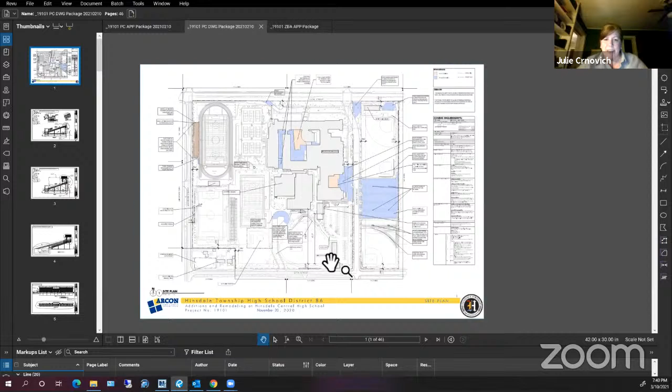And I was wondering, do you think it would be possible to do like what you did at the ZBA meeting and break it down per each request on the application? Yep, what I'll do is give a quick overview of everything, and then drill down on each portion, so we'll talk a little bit more in detail about the grandstands and the additions and whatnot. Thank you, that would be great, I'm trying to follow that same format. Thank you. For sure.

So this is phase 2 of the referendum projects. Last year we went through this same process with phase 1 successfully. This is the second piece, and will be the final piece for the referendum projects that we bring to the village.

For phase 2, we've already gone through 3 meetings with the Zoning Board of Appeals. Several items were approved by the board, and several are recommended to the Board of Trustees for their final jurisdiction. We're planning to go to the Board of Trustees next month.

Just to recap on zoning, we went for 6 areas of relief with different variance requests each. Those areas were the grandstand and press box structures, and the perimeter fence behind the grandstands that we need to remove and replace to get to the grandstands to do that work. We also have a new ticket booth accessory structure for the football field.

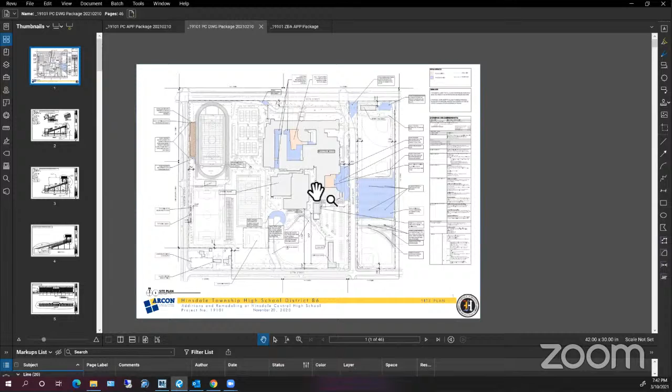At the varsity baseball field, we're proposing safety netting, very similar to phase 1 at the JV field. There were some fence replacements at the JV softball, JV baseball, and varsity baseball fields. And at our east parking lot off of Grant Street, the new lot we put in last summer, we requested 2 additional parking lot light fixtures with the ZBA.

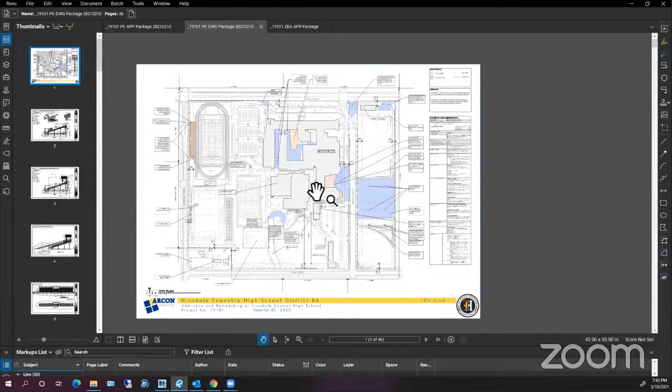For phase 2, just like phase 1, our goal is to match the existing conditions of the building aesthetically and architecturally as much as possible while upgrading to today's standards. All of our work and additions harken back to phase 1, and we're trying to match what we did there for a complete campus feel.

I'll move from left to right because that's how our application was really assembled. So here's a site plan of the high school campus.

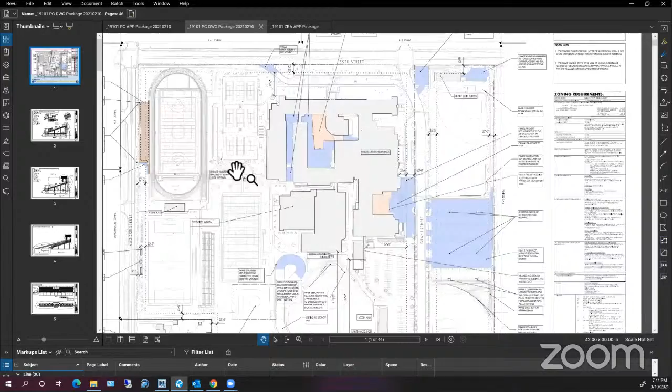First, we have the home side grandstands and press box, proposed to be replaced relatively 1-for-1. We're proposing a new ticket booth accessory structure, kind of in between the practice field, tennis courts, and football field.

The areas highlighted in blue are either parking lot or street roadway renovation work or replacements. And within the courtyards proper, restoration work, because we're tearing up the site pretty good in order to get into the interior courtyard for the student services addition.

With athletic fields, before I get into the building proper, we have work proposed at the varsity baseball field here—a backstop replacement with a masonry knee wall and safety netting, an improvement over the chain link backstop that's already there, very similar to what we put in for phase one. There's some ancillary chain link replacements there as well.

East of Grant, we have fence installations in the outfield for the JV baseball field to protect from a new proposed drainage swale. And at the junior varsity softball field, backstop and chain link replacement—it's about time that chain link fence and backstop be replaced.

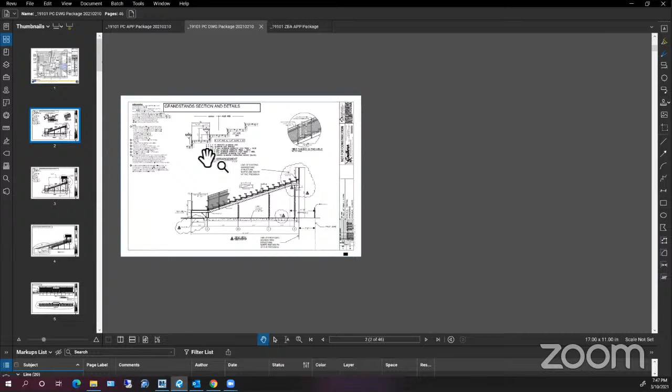Getting down into more detail, a more granular level—grandstands and press box. Some of the highlights here, I might jump around a little bit, but we're replacing the structure. It's time to replace it. We're not expanding it.

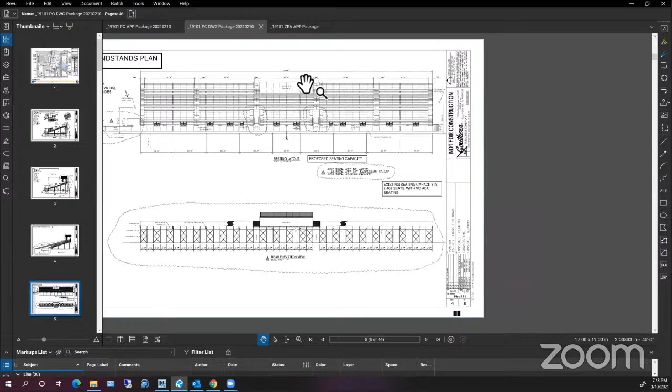The existing seating capacity is 2,402 with no accessible seating. New seating is 2,409 with accessible seating—a slight increase, not by much, but with a much more accessible layout and better sight lines. There's also a slight increase in the press box size. What's out there currently really doesn't meet today's varsity soccer, baseball, and lacrosse field standards.

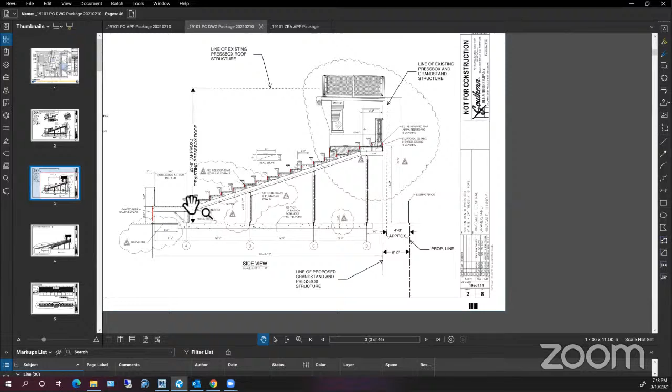Some other highlights to mention: the proposed press box is actually shorter. The overall structural height is proposed to be 20 feet 9 inches to the top of the roof. There's an observation deck here, just as there is currently. But the existing press box is higher than that, at 23 feet 6 inches. With improved angles of repose and sight lines, we're able to reduce the height of that structure. So although it's an incremental improvement, it does slightly improve sight lines from residences across the street.

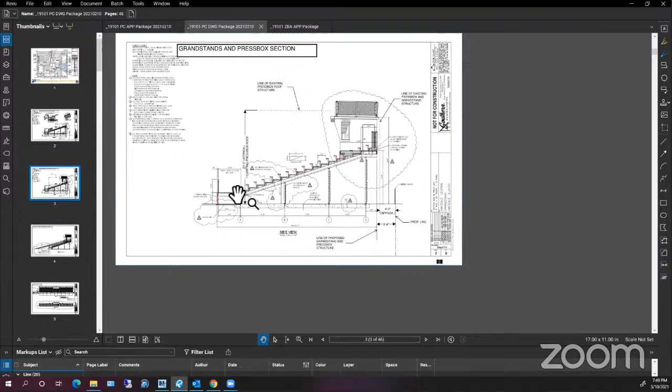Grandstand press box and the colors we're going with - again, we're looking to match what's existing. The grandstand press box manufacturer doesn't really provide colorized renderings or details, but I do have some examples to show. The press box will be white in color with red trim.

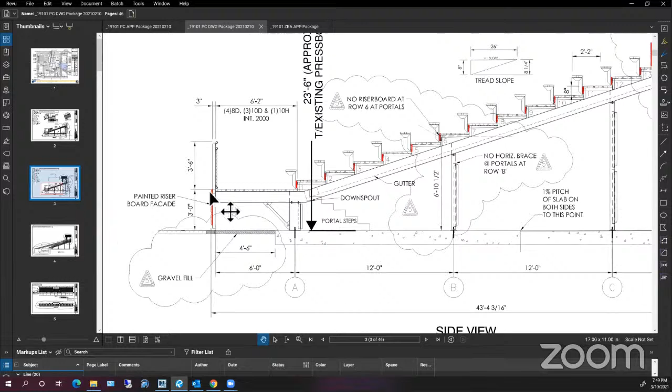The general structure of the bleachers will be anodized aluminum, just as it is today, with some highlights - the riser boards, highlighted here in red. At the track level, the front riser board, and if you think about when you're sitting on the bench in the bleachers, what's behind your knees, kind of behind the calves - these riser boards would be red for school colors.

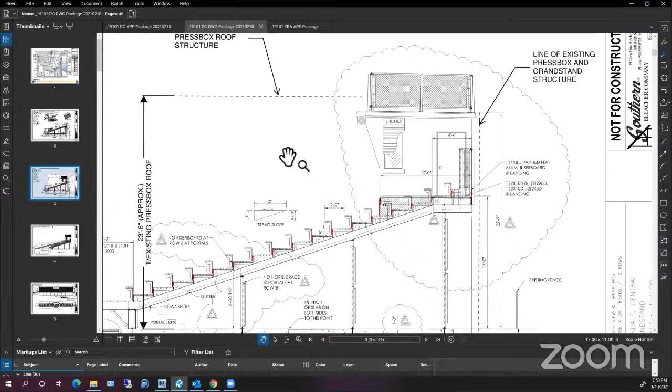Any chain link fence that we have - existing is anodized aluminum now. We are proposing black vinyl, which is an upgrade to match what we've been doing elsewhere on the site for site athletics. Cleans it up, looks a little sharper than just the anodized aluminum, so a bit of an upgrade there.

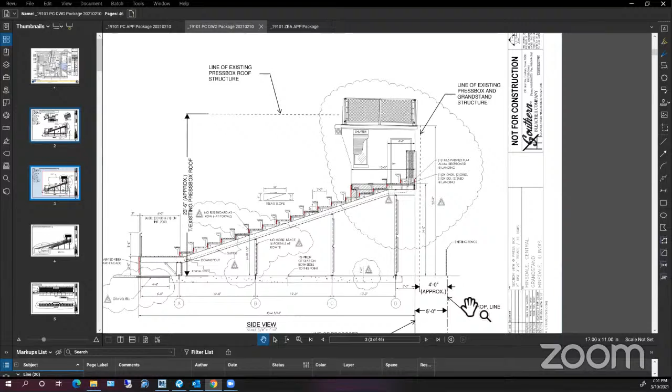White, I don't think red. Can we see what you're trying to display now? Do you not see? Still see the cars - there you go. Oh, there, okay, now? Oh, I'm sorry. Thank you for the heads up.

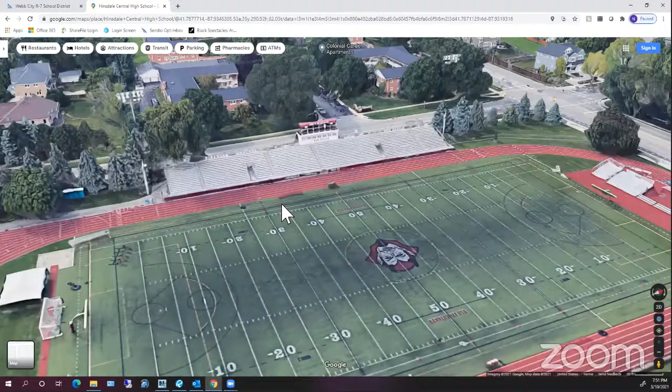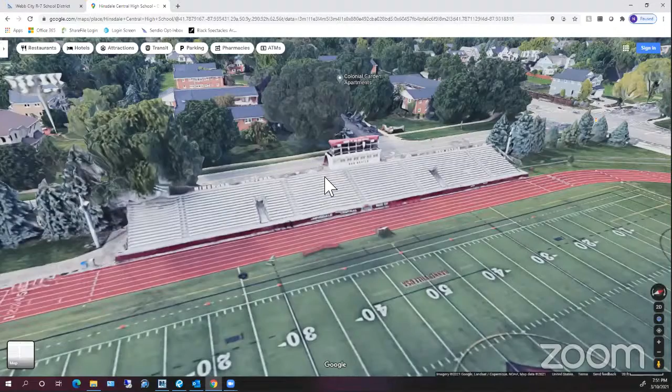You're good. So this is a view of the, a little bit of an older aerial, but the existing press box bleachers - white press box with red accents, anodized aluminum structure, kind of turning around to the backside off Madison.

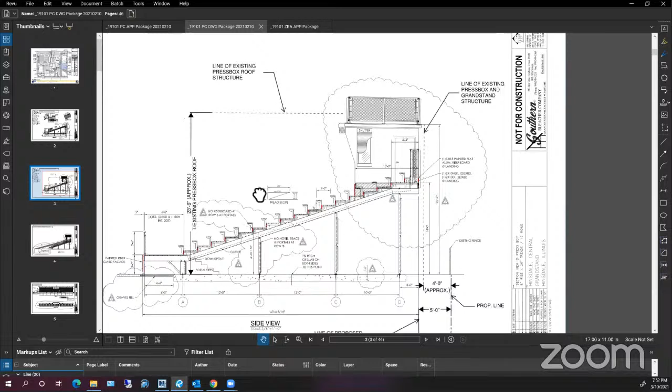Okay, we should be back to... are you planning any of the stadium lighting in the section drawing? The stadium lighting is all existing to remain - we're not touching the stadium lighting. Thank you.

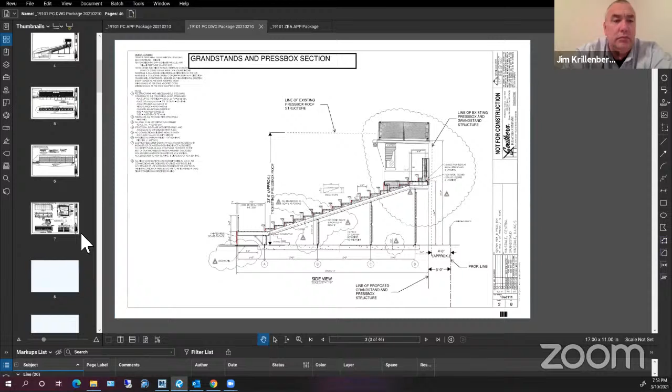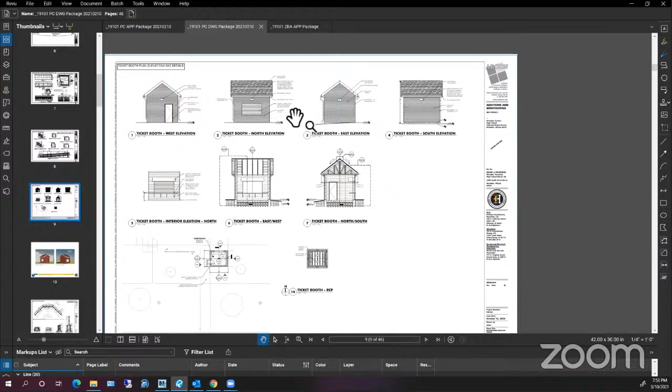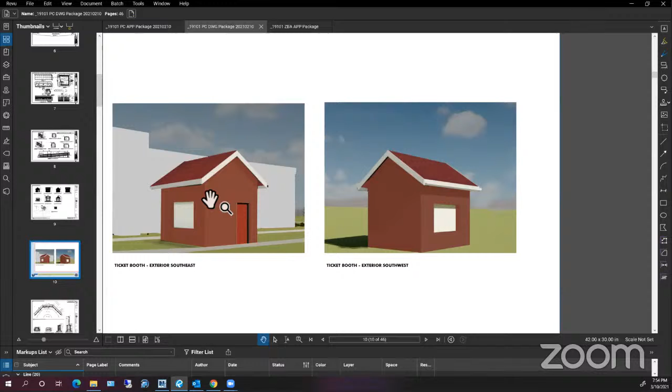Moving a little further into the site, we do have a very simple ticket booth structure. If anybody's familiar with the campus, there's what they call the huddle house on the south end of the football field - this structure is meant to really play off that and match. That huddle house has red brick with a darker maroon red shingle. Again, going with school colors - red, white, red door, and the overhead would be white as well. So again, we're trying to match structures on campus where it makes sense - this is the site athletic building next to the football field.

Similar question to the lighting - are you moving fencing around? Fencing - what we have proposed, and what we went with for zoning, is really one-for-one replacement. There's no new fence locations.

It's a one-for-one replacement where, for instance, behind the press box here, this existing fence needs to come down so we can get to, take down, and put up the press box and grandstand, so we don't destroy the new field and track we put in last summer. Any other fencing related to the baseball and softball fields is all one-for-one - we're not moving fencing, we're not putting up new fencing on the west here. The only new fencing location is in the outfield to the JV softball.

Great, that'll be welcome. And yep.

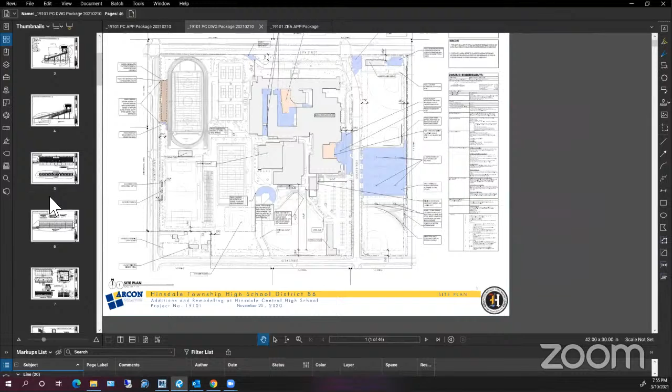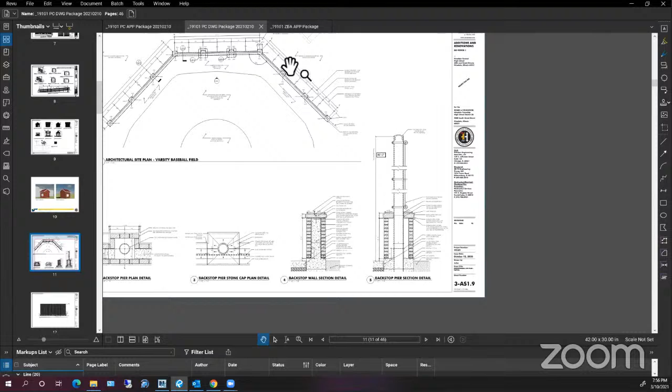Moving on to the varsity backstop, again, safety netting. This is exactly what we put into the JV field last summer. We are putting in a new masonry knee wall. You can see this detailing on campus at the North Varsity softball field by the admin building, off of 55th Street, again red brick to match. There are dugout structures here to the south. Those dugouts are all existing to remain. We're just matching what's on campus.

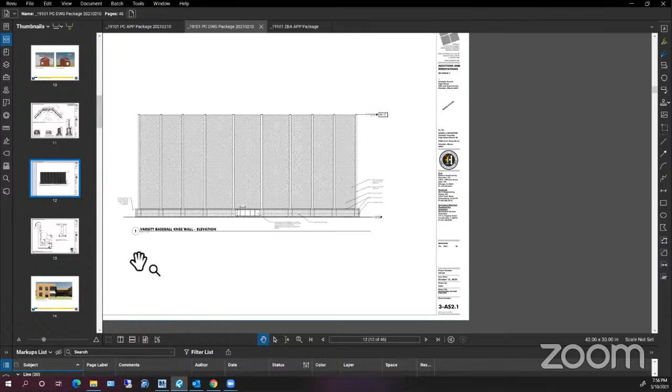Okay, so now moving on to major additions. First one here is the student services addition. We're cleaning up and repairing the courtyard because we're tearing into it pretty good for the construction of this addition. The addition's clad in brick, and the brick matches exactly what we did in phase one and proposed in phase one. We're going for a consistent feel for all the referendum projects.

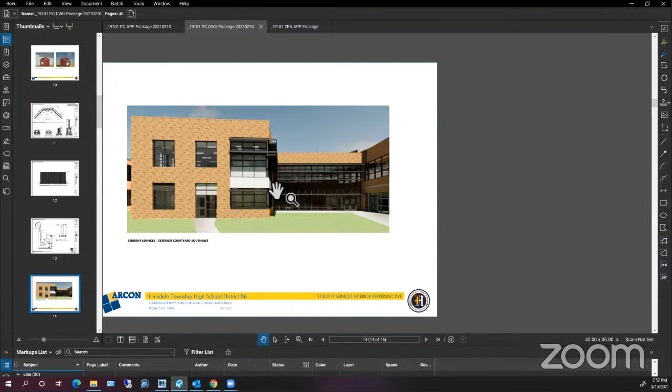We do have aluminum windows and curtain wall, some metal panel, white metal panel banding accents. Again, you can see that on the phase one additions, matching that. We do also call out for some sun louvers here on the south end to shade the inside spaces with that southern exposure. The other thing it does, it covers up the old library addition, where the brick didn't match anything. So we're bringing it back to, again, a consistent campus feel.

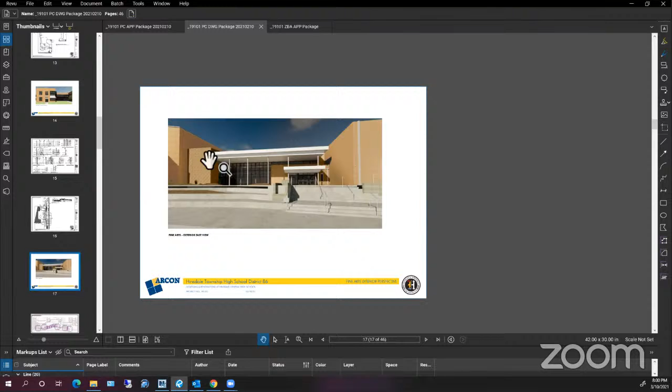Kind of an added outdoor space that they don't currently have. So we tier back, and again, the brick color is to match phase one. We have aluminum curtain wall, storefronts, and these canopy structures are all clad in that metal panel banding, again, to match what we've done for phase one.

Where are you moving the mechanical, delivery, and all the things that used to be there?

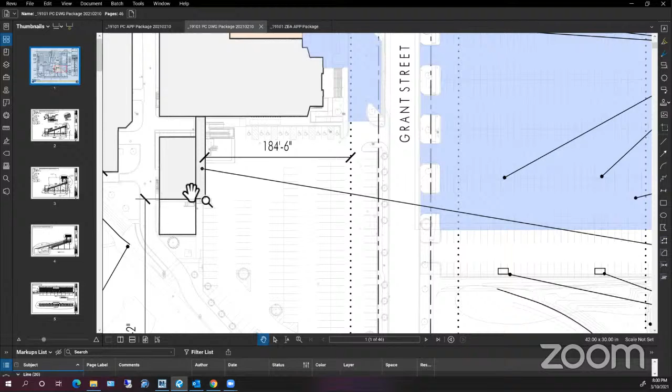Sure. So that was part of phase one, so this is where that fine arts addition is. This link here was what we put in, and we renovated space in this chiller building. It was a chiller building, and then the district had some future thought that they needed space for either mechanicals or offices down the line. This was a fairly recent addition.

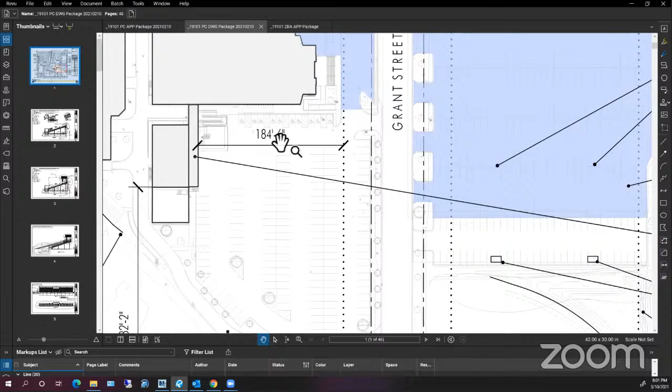So we took the loading dock provisions and modified what was there. So all the functionality of loading dock, trash enclosures, fully screened, and all that good stuff, and buildings and grounds offices were taken out of the middle of the campus and moved more appropriately to the south lot. So we kind of grouped everything. We got this maintenance garage here off of 57th Street, and then buildings and grounds, kind of isolated and away from the rest of the building.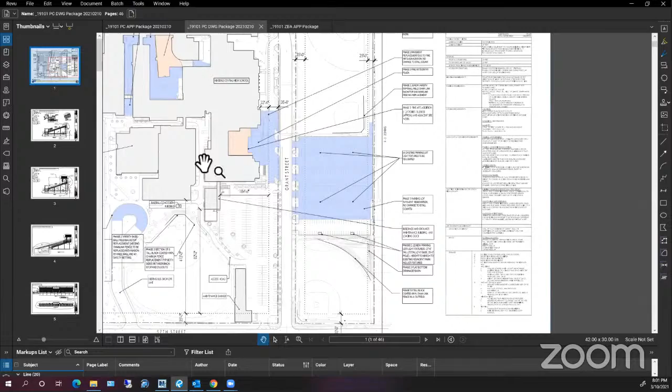And then we put in a new emergency vehicle access road to get up and around and through the west end of campus, because we cut that off with that link. So it kind of groups everything a little better once everything's done.

And that's really the bulk of it. We do have photometrics included; we have some pathway lighting and light poles in the new plaza, going for a bit more modern, updated look.

Again, we're not seeking any variances here. We're looking to stay within village code. The only variances we were going for lighting were in the new parking lot here off of Grant Street, and that was an accessory height variance to match the poles that are currently there.

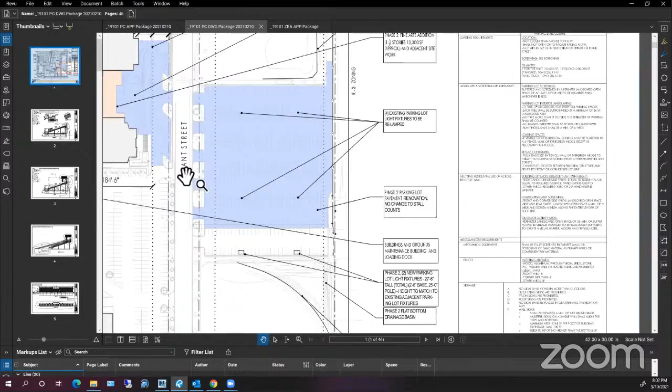I think that's a pretty good overview. Is there any specific questions or areas you'd like me to delve a little deeper on?

I'm wondering if we could start with each improvement. We have a list of 9 here, so if we could go down that list that's on the application.

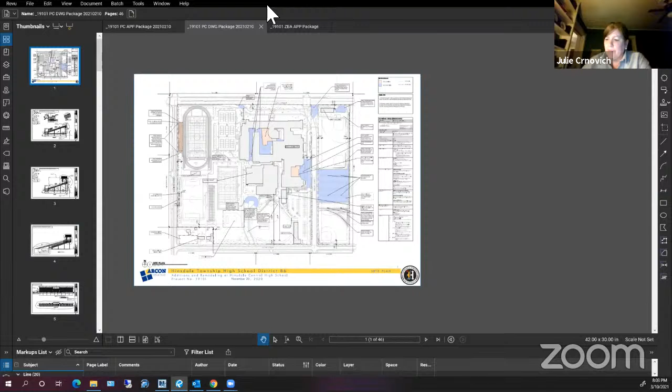Sure. So the first one would be the Fine Arts Addition, entry plaza and site lighting.

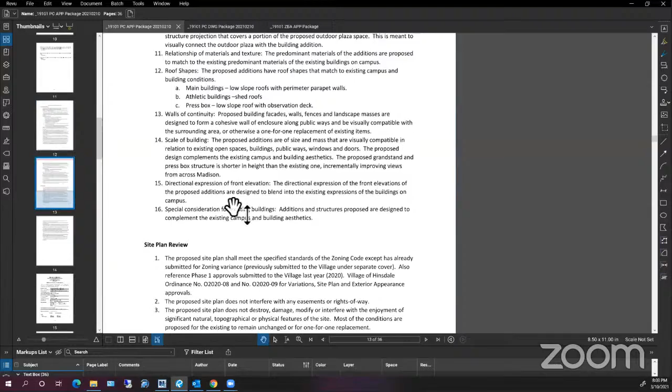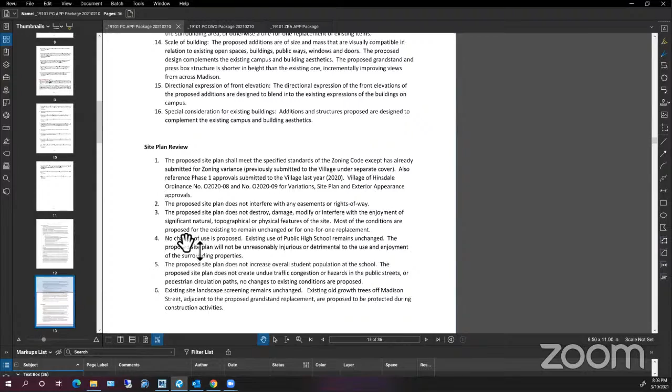I'm just looking for that list so I can, is that list off of my application? No, it's off our memo. Well, why don't I, if you can prompt me on the area off the memo, and then I can jump to there.

So it sounded like the first one was fine arts. Yes, the Fine Arts Addition, entry plaza and site lighting.

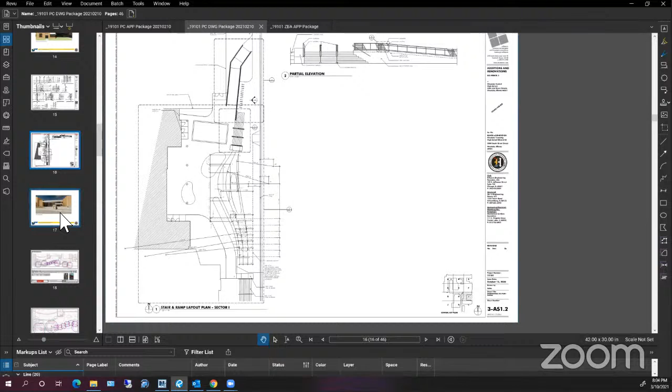Okay, so kind of going back to here, this is the entry plaza. We have landscaped islands here. It's a concrete elevated plaza. I think we went over the aesthetics of the building and the lighting.

And that is so, it's much needed at Hinsdale Central. The whole addition is, I think it looks great. Did anybody have any questions about that part of the application?

No, my biggest concern was making sure that it all flows, and brick color. It sounds like that's been very closely monitored so that the additions, each of them, are going to be compatible with the existing high school.

One question I have. Go ahead. The one question I had is about the photometrics, both on the parking lot and the Fine Arts Addition. The parking lot addition specifically highlights that there's not going to, this makes no representation that it's code compliant. Code compliance will be reviewed by others. And I can't find anywhere in our paperwork that the lumens per meter or foot candle calculations are compliant within our code.

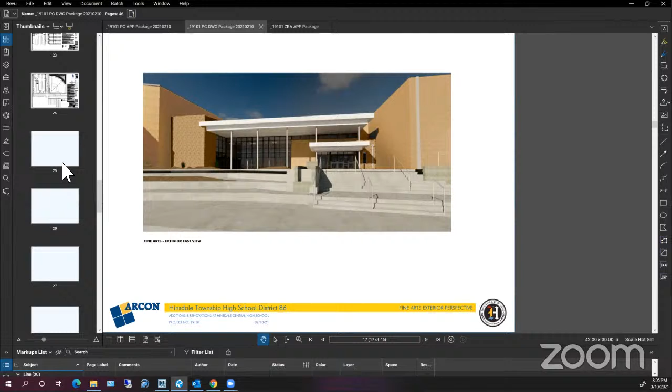And this question is more for the village staff. Am I missing that in here? No, thank you, Jerry. It's Rob. Can you hear me? Yeah, I'm unmuted. So I looked at that same area.

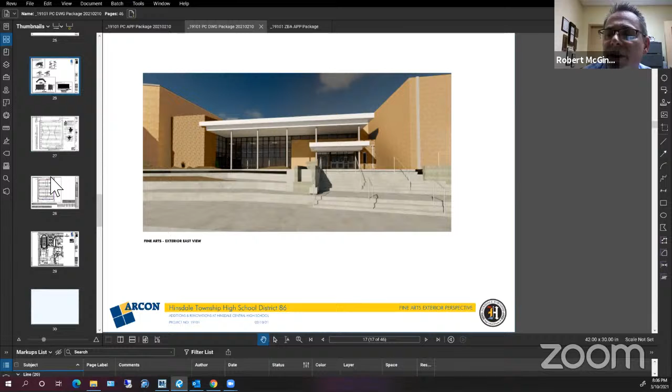Obviously, our concern was the east side of the parking lot there, where they're installing 2 more fixtures that exceed the allowable height to match those existing lights. And we did take a look at those numbers. If you look at the lumen survey there, you've got 0.5 that's highlighted in red there. That's we can't exceed 0.5 at a residential lot line. So they're at or below the maximum permissible lumen level at the lot line.

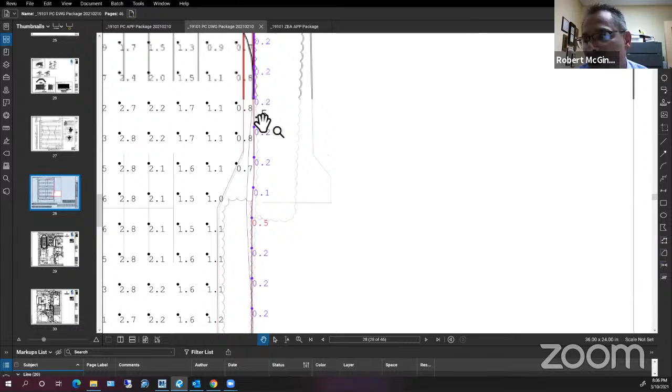And we'll actually go out there once these are installed to make sure with a light meter at night that they're not exceeding that. And if so, we'll have them put shields on the fixtures accordingly just to get that number down at the lot line.

Will the lights have shields? They do have, the easiest way to describe it, like the dark sky cutoff. They do have shields to that effect.

And the lights that'll be relamped, will those have shields? Yes. And I think, Jason, if you're on the line, at a certain time, don't these lights dim down? Yes, at night. So the way the property is set up, when these turn on, they have security and normal lighting. So at night, at about 11:30, the normal lighting will shut off, which would be half the fixtures, and the other half would stay on for security lighting.

11:30 seems so late. Is there a reason for that? Well, we do that because sometimes athletic events and other stuff run late, and we also want, for the safety of our employees that work till 11:30, for the custodians cleaning the building, to have lighting for them, because sometimes they do park in that lot.

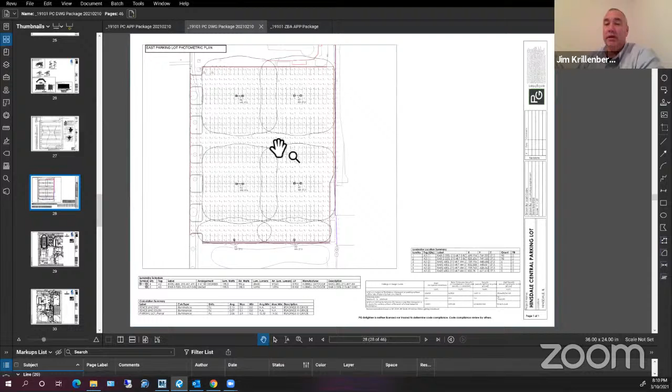Okay. Yeah, I'm sure you hear this from everybody, but the high school is sort of Hinsdale's front door, I consider it to be. So it's important that this all gets done in a way that reflects well on our community. So I appreciate you doing all the stuff that you've been doing. Thank you.

This referendum was a big deal for the community, and this project in particular is a gem, so we've tried to treat it with that level of respect.

If you can save some money, that'd be great too. Yes, we are constantly eyeing the budget and always looking for ways to get it on or below target. The last bid period we went out for, which is a lot of the work we're presenting tonight, came in very favorably. Everybody's hungry because of the pandemic, so there's definitely some silver linings to it.

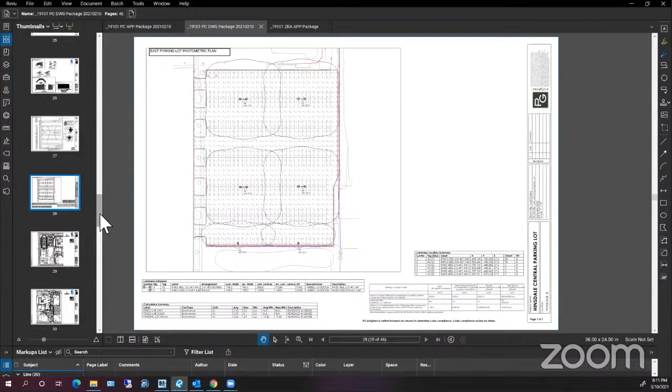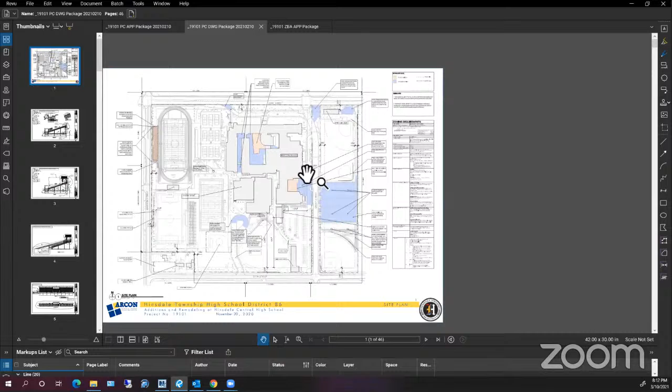Do we know when this might be finished? It's phased. The exterior work, a lot of the additions, are 12-plus month projects, kind of in the 18-month realm. The fine arts addition I believe is scheduled to be largely complete this fall, maybe a little after. The student services addition, because of the complexity of building inside an existing building, is more of an 18-month project. We'll break ground this spring and that will carry through to next summer, summer of '22. As for the referendum projects, there's still another phase after this, but it's all interior renovations, also targeted for summer of '22.

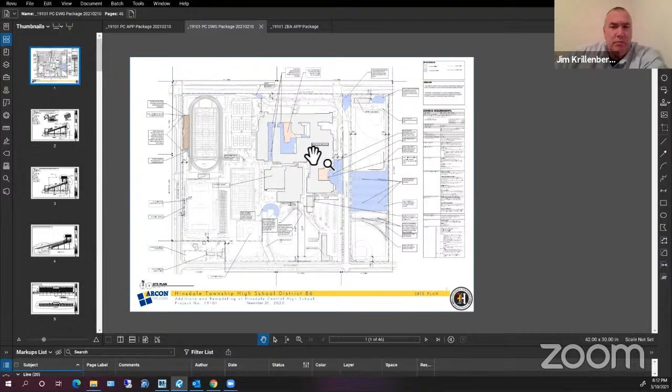I don't know if I'm exceeding the purview of what we need to review, but the ticket booth building—is that replacing an existing building? That is a new structure. They don't currently have any ticket booth on site. I think they were just setting up folding tables outside the track and on the sidewalk. So that's a new structure.

We did take a look at zoning provisions here for FAR and all that, and our calculations all meet village code. It is where it is so that it can serve the tennis courts, football, soccer, and everything. Right—last phase, gates were installed right around this phase 2 note box, so that would be the entry point for the track and field. Yes, it's more centrally located to pick up the other fields and courts on site.

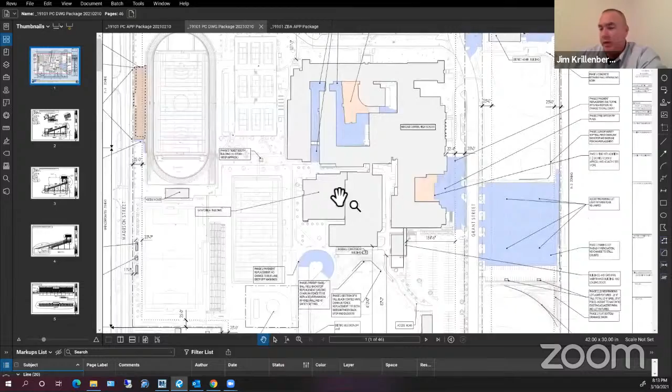Okay. And Julie, you wanted to go one by one. Well, I think that's where we're kind of out, but we're covering it all. Good, I agree. Steve doesn't do much better at controlling us either, Julie. Don't feel badly. No, it's much harder on Zoom. I don't know how you do it, Steve.

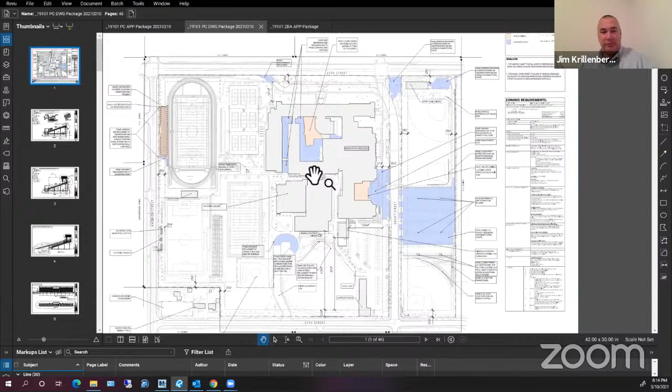Well, I missed the physical parts and pieces—what are those called? Samples. So we're kind of taking your word for it that all these bricks and colors are going to be harmonious with the existing building, because you said they're identical, right?

Yeah, if you actually drive by the school, the brick is going up currently at the pool addition, and the brick and metal panel work is completed at the buildings and grounds. So feel free to see it live and in person. We really tried to complement everything going on with the existing campus—I think we covered this a lot during phase 1 approvals at plan commission last year. There's a ton of different brick through the various additions over the last 70 years for this building, and coming up with a good match for everything was a challenge.

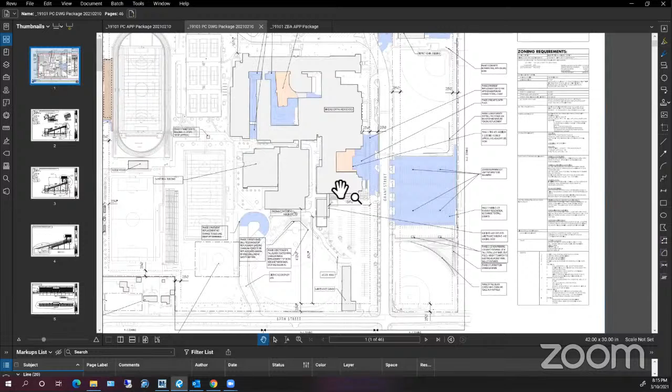And then we had the additional challenge of plant shutdowns during COVID. So what we have out there is a good match, trying to bring the campus together while reconciling 15 different iterations throughout the years. The buildings and grounds work is up, brick is going up, and I think metal panel work starts soon at the pool addition as well. I drive by there almost every day, and it's interesting seeing the cranes out there.

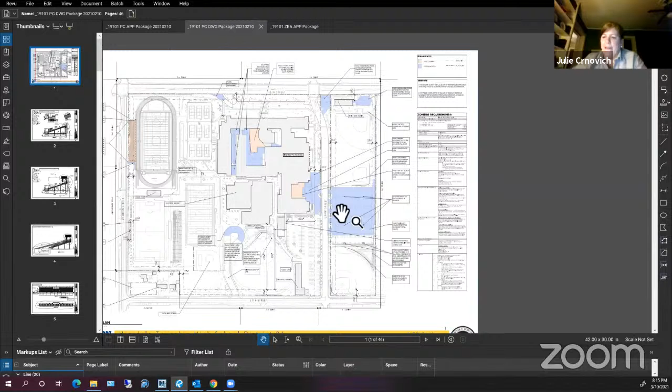Yeah, we've had some pretty big cranes—I think a couple of days ago they put up one of the big mechanical units for the pool. I just got a video from the contractor, haven't looked at it yet. Lots of crane work, and there were extra cranes on site last week because the village or somebody was doing work on the water tower. It's been heavy construction traffic for sure, getting deep into the site.

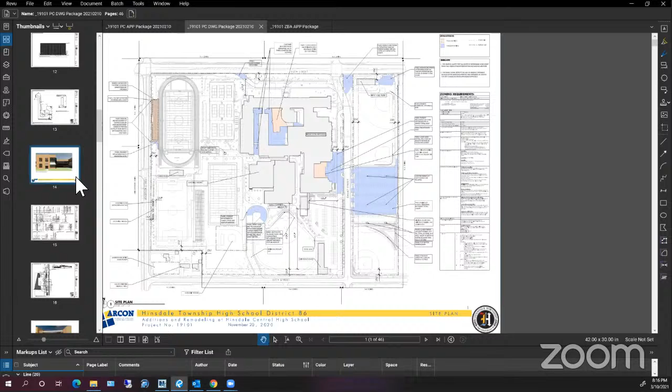Where haven't we covered on that list? Any questions maybe in the courtyard addition here for student services?

I think that looks great. It's another big improvement. Could you talk a little bit about the netting on the fields? Sure.

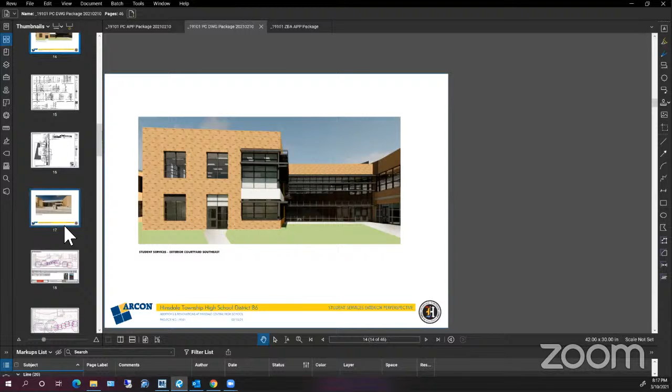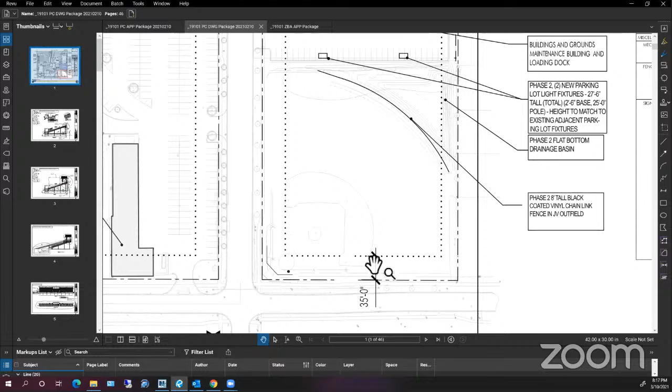Let's go back here. A good example is to look at what we did last summer in the JV fields if you drive by. Part of the application for the zoning, the ZBA and the Plan Commission, was putting pretty much identical safety netting, though we didn't have a masonry knee wall at the JV field. Going for the same look, the varsity softball field more towards 55th Street has the same type of look of what we're proposing for the baseball fields.

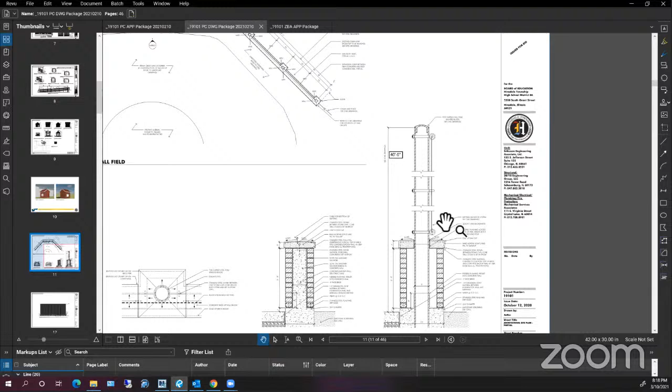Let me pull up that drawing. The posts go up higher for safety reasons, about a 40-foot post, and these posts are black. The netting is a black mesh, but if you stand a little bit away, that mesh starts to visually disappear.

Right now, currently, we have a chain link backstop and fence for the baseball field. It doesn't look as dressed up or collegiate as what we're proposing here. A lot of fields are going this way to provide safety netting versus that hooded backstop look. The brick here is meant to match the dugouts, which are flanked on each side, with a cast stone cap. It's really the same detailing as the existing varsity softball field.

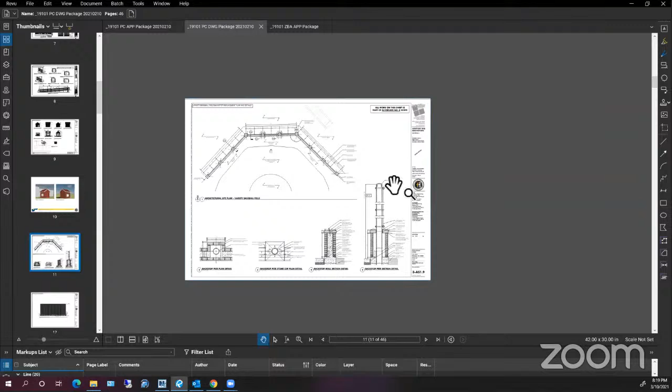It looks like there's some pulleys on the posts. Is the netting retractable like a major league stadium? There is some retractability.

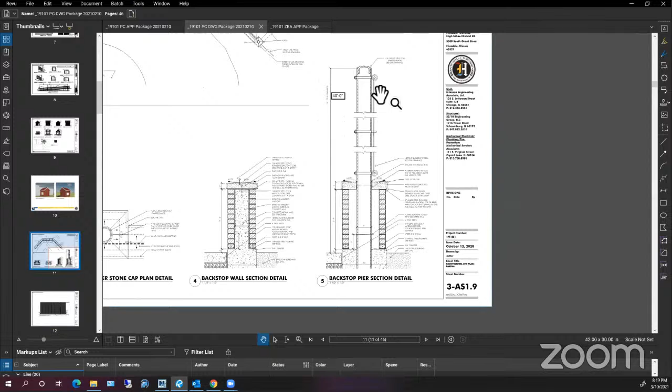Whether or not that netting gets taken down seasonally or gets left up is really for maintenance. It's not meant to be taken down and put back up on a weekly basis for games. So that netting would only be removable seasonally, if the district chooses.

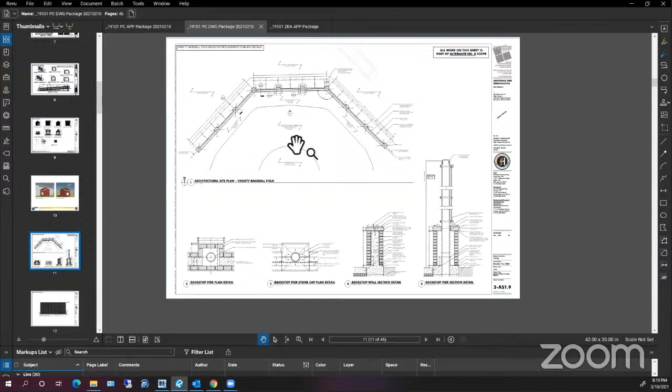Well, that covers a big safety issue too. Right, and I don't think the district wants to be taking this up and putting it back for each game. With 40 feet of netting, it's going to be quite a task to take that up and down. A lot of those pulleys are for retracting and adding tension, so if any of the netting gets loose in the wind, we can retract it and make it tighter for safety.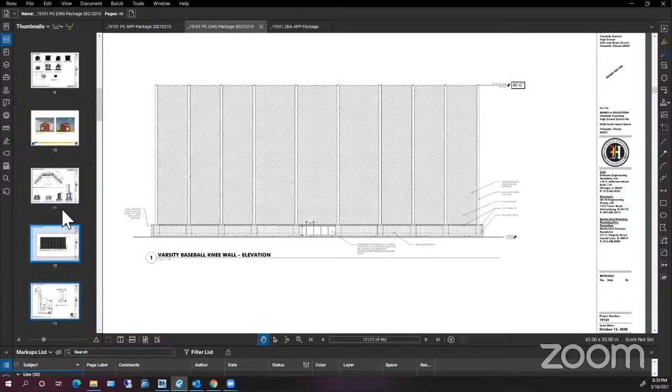Any questions on the grandstand press box? I was pleased to see that the ADA seating is being added, and also that the grandstands are staying pretty much the same size.

Yeah, we were very cognizant and trying to be good neighbors. It was really important to the district, and it showed. So we actually went through quite a bit of iterations with Southern Bleacher, who's the vendor providing this, to get this right. We didn't want to bring something to the village that wouldn't have a chance for approval, so we really tried to do a one-for-one replacement, making improvements where we could.

And you're eliminating the visitor stand, so it's only home team cheering? I wish. Those stands, although in phase one we did do some pavement and fencing work over there, those stands are existing, so they don't get as nice a seating. But there's some areas where there's accessible seating already there. So they already have ADA on the other side too.

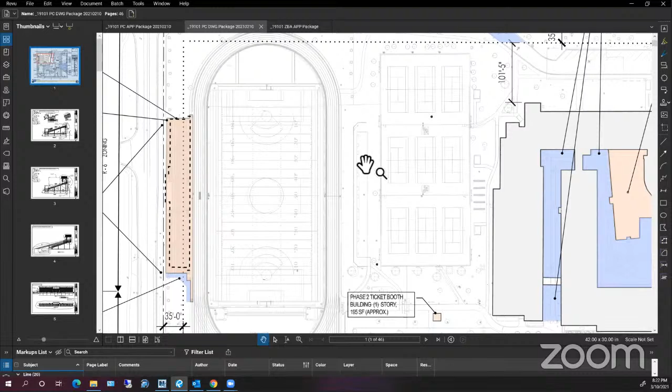Right, and with putting up those red riser boards, you kind of get that more school feel. So you get to show your school colors and pride to the visitor side. Great. It's always fun being over there or driving by during a football game. Very lively. Yes.

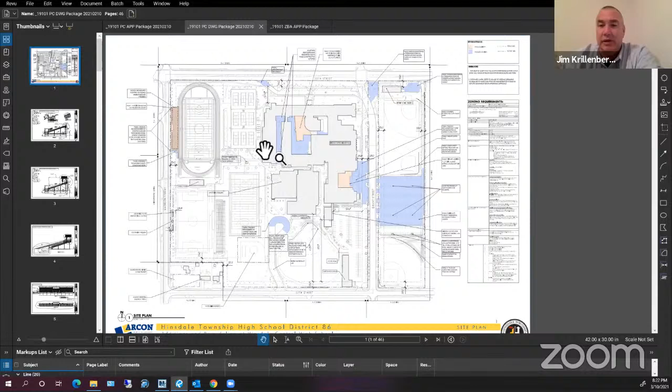Did we cover the 6 points? Feels like we did. And I know Steve is standing to the side, but is he able to comment based on the work that his committee has done? Is there anything that they had any particular, I don't know, crossroads that they chose one way or another that is worth discussing?

I don't even know if that's a proper question, but. I don't know that either, but I'd say the committee was very supportive. That's useful, I think.

And the committee is made up of architects like yourself and people from the community? Yeah, it's quite a broad group, with a lot of people in architecture, engineering, construction, and just regular citizens. It's quite a big group. Great.

Well, and I think the application, I think you thoroughly covered all the criteria that has to be met for site plan and exterior appearance. Does anybody else have any more questions?

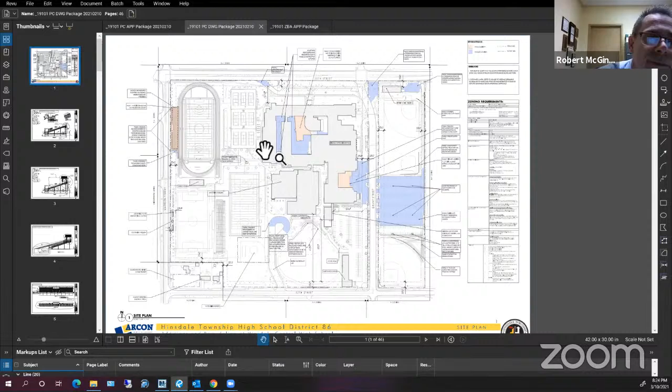And Rob, is anybody on the line, any neighbors, anybody from the public wishing to comment? No, we don't have anyone else on the line here, but if I may, Nick, there was a question that didn't come up - would you mind discussing some of the stormwater improvements the district's undertaken in conjunction with phase 1 and 2? I know Commissioner Willoughby's an engineer and may have some interest in that.

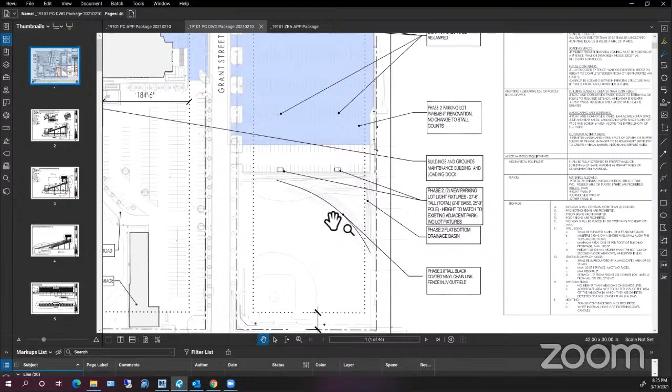Sure. For this phase of the work, the only new item we're putting in is a flat bottom drainage basin, and that's driving the fence because it does encroach on the field, to protect the players in the field of play. That was really due to review comments with engineering, working closely with the engineering department about what was provided originally for the original lot east of Grant, and then with our new lot going in. So it did trigger some requirements for additional drainage.

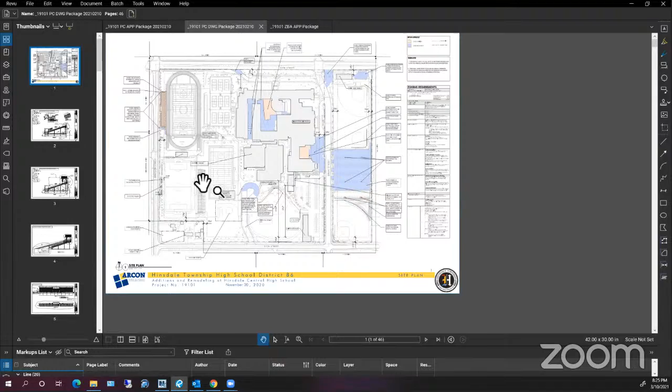Above and beyond that, a big part of the phase one work was working with Flag Creek Water Reclamation District to correct things on site and get everything within code. A big portion - in phase one we fully replaced the soccer field off of Madison Street. We had to find a place to put underground stormwater detention, and we ended up taking out the existing soccer field because it needed work and had drainage issues itself. We put in massive drainage structures - I don't have the acreage, but it's really the full amount of the soccer field - underground stormwater detention, then put dirt on top to build up grade, and put the soccer field back on top of that.

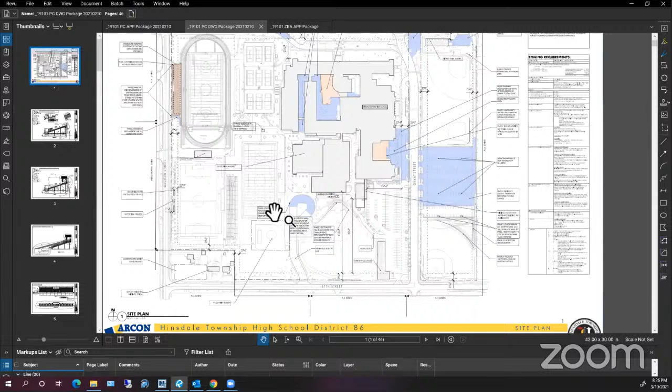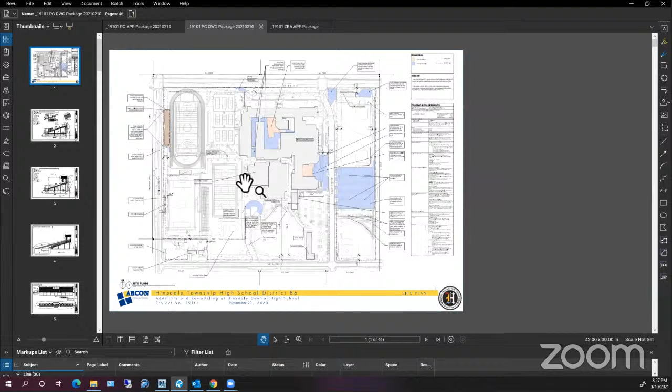So, obviously we're packed to the nines, using every square inch of the site. Stormwater detention was a big challenge, and that's how we solved it - we put it all underneath the soccer field. We worked closely with Village Engineering and Flag Creek to not only correct existing issues on the site and bring it up to current code, but with the new additions, take care of all our stormwater detention requirements.

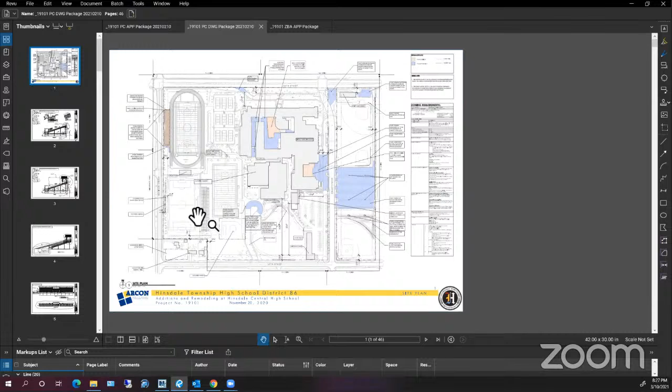All right, no, I appreciate that, Nick, and thanks, Rob, for bringing that up. I did look closely at that. I also noticed you have the unilock permeable pavers in the courtyard, which I appreciated, maintaining the bioswales on the north side, and then obviously the wetland basin. One comment I'd have, not necessarily from a plan commission perspective, but that's a great education opportunity for how to manage stormwater through the bioswales and permeable pavers. Might be an opportunity for the district to consider educational signage if that isn't there already in some of those features.

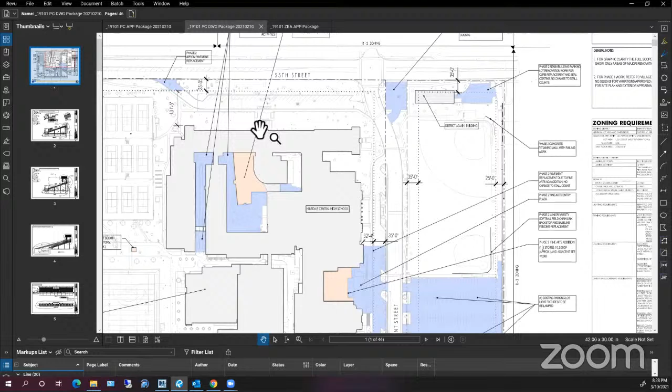Sure, excellent point. There is some signage already in regards to that - maybe not for some of the new stuff yet, but towards the front, the main entrance off of 55th Street, there's educational signage and opportunities with the natural plantings up there, and some additional natural plantings around the bus drop-off loop and whatnot. So I think that's a good suggestion.

Any further questions, comments? I think we've covered pretty much everything, at least everything on my list. But again, thank you for such a thorough application - I think the application pretty much covered everything. Excellent, thank you.

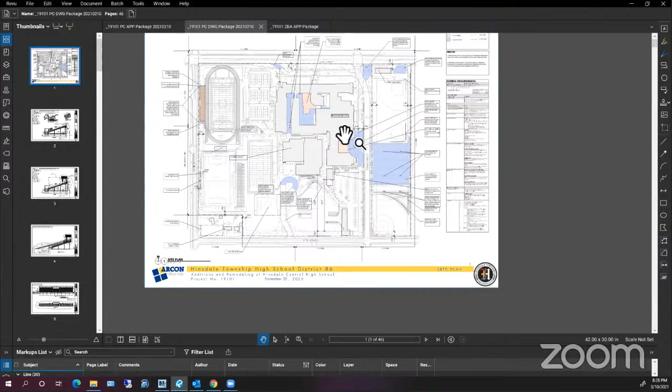If I could please have a motion to approve case A-02-2021 for 5500 South Grant Street, Hinsdale Central High School, Hinsdale Township High School District 86, exterior appearance and site plan review for various development requests as part of phase 2 referendum improvements. So moved, Willoughby. Second, Unell.

We have a roll call, please. Certainly. Commissioner Krillenberger, aye. Commissioner Hurley, aye. Commissioner Fisher, aye. Commissioner Jablonski, aye. Commissioner Cernovich, aye. Commissioner Willoughby, aye. Commissioner Unell, aye. And Commissioner Fiasconi... Aye. Did you hear me? We got you, thank you.